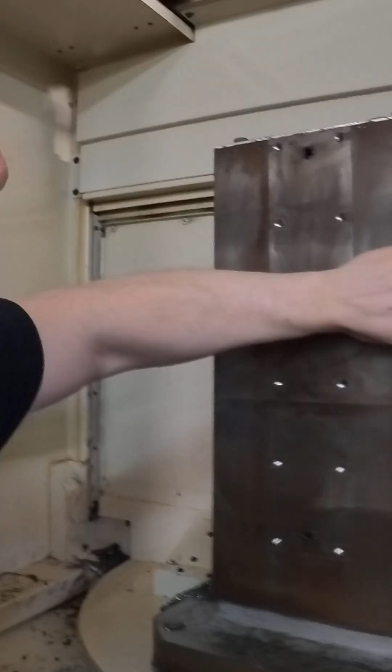However, I'm a little worried right now because I forgot to account for the fact that there's just not a lot of room, and with the wider trunnions I might not be able to use the plate like I wanted to. I was going to do kind of an exact copy of what I've done previously. This works great for 100 series, AK-47 or 74s, but with these wider ones I probably should have got a wider plate, so I may just exchange that, or I do have other fixture plates that can cover the entirety of the tombstone, but I'm a little wary on doing that on a first run of these, because if I mess something up, I mess up a big piece of steel versus just messing up a little test piece.

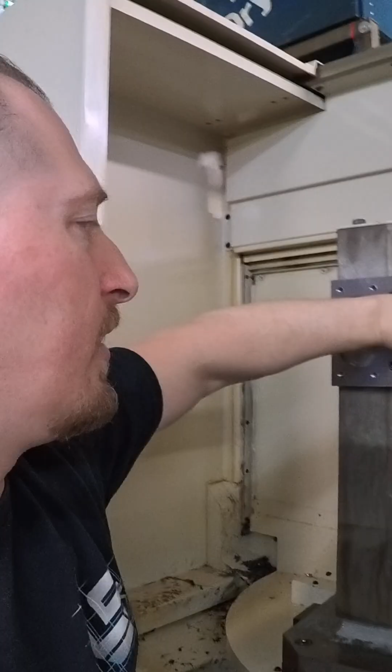But we'll get into it and figure out if I need to or not. I mean, I got a little room up there. It'll be scraping the edge, so I'll know once I design it in the modeling software. But right now I'm a little unsure.

Over here about to try this little repair on that stripped out set screw from the other day. Sometimes I like to just wait until I'm in the mood. I gotta be in the mood to mess with this stuff where it can easily get jammed worse and have a tough time. So we'll just see how it goes.

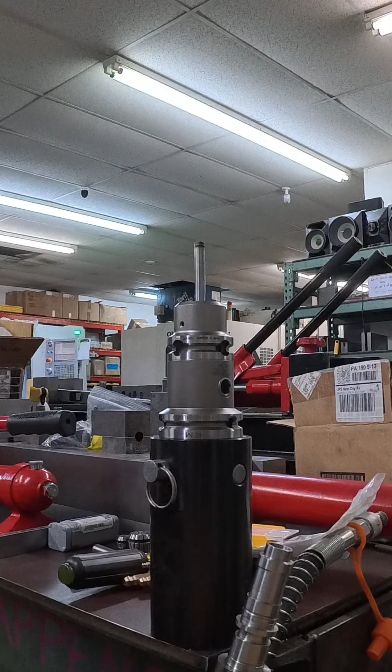I'm gonna drill it here with a... no, sorry, this is a 110 drill bit. I want to stay right in the center of this when I'm drilling it out.

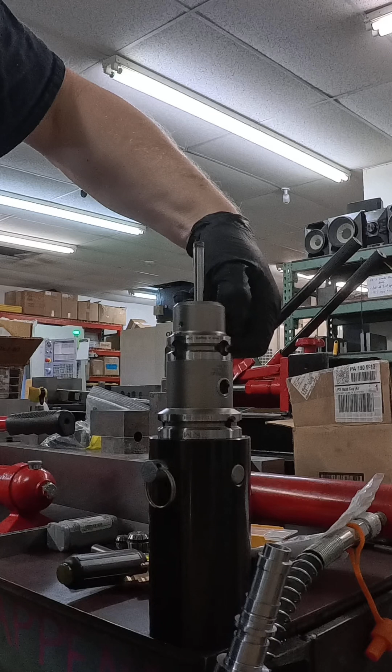It's actually a pretty long set screw. I'll take out the other side. You can see it's definitely over half an inch in length. And what I think happened is the tip of it mushroomed, and that's why it's not turning. Also it was just a junky set screw that had a pretty easy to strip out socket area. Actually, yeah, this is really long, so maybe three quarters of an inch in length.

But I'm just gonna get in there, I got this special easy out, just see if I can get that thing out. It's a pretty soft set screw, as you can see. Normally when you're drilling something like this, normally you get those hardened set screws. This one is not hardened, this one's made of, looks like stainless.

This should sink in there pretty good, and then we can try to turn it again. Based on how that's going, I think I'm going to go a little bit deeper. Of course, if the easy out don't work, I'm stuck drilling it out anyway.

Okay, yeah, that's good. Now we can tap that in there and get a wrench on there.

Matt, couldn't you find a smaller ball peen hammer? Tap wrench.

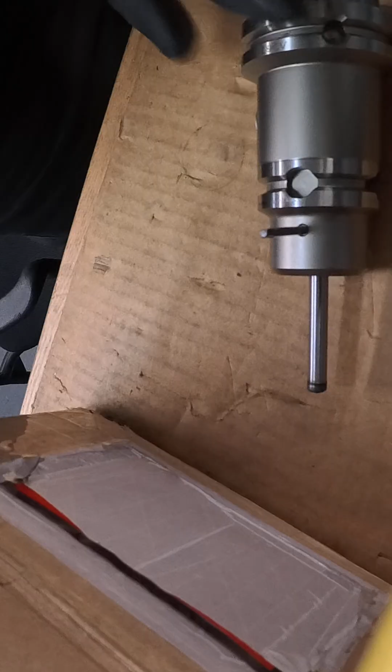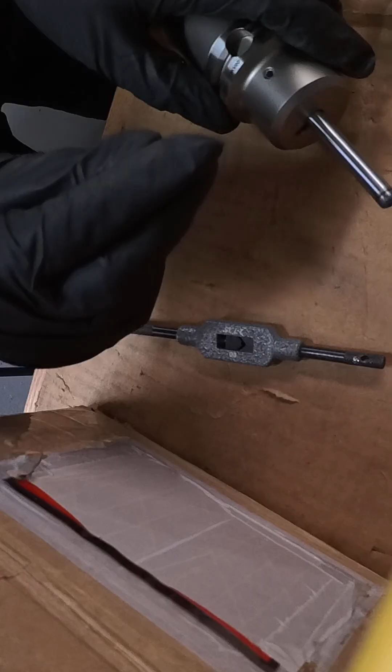She's just backing her way out. Come on. Why is that? Okay, I'm quickly losing being in the mood for this. Just how this is going.

Okay, look at that. There we go. Alright, haha, I'm the man. Okay, now, oh shit, it broke in half? Are you kidding me? Fucking A.

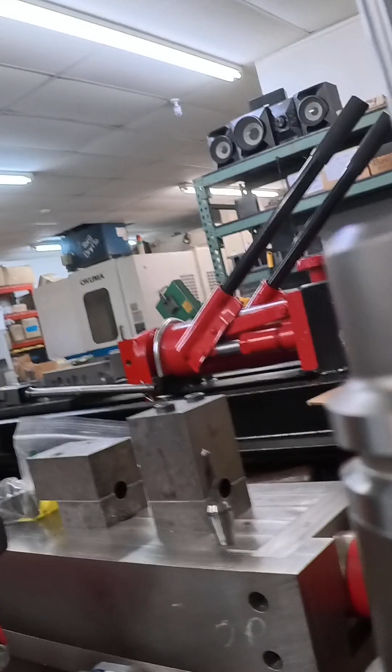Okay, so to review, you're not always good. This thing broke in half. This is the opposite side set screw. We drilled through, we got it to move, but the tip must be so mushroomed that it's split in half.

So we're gonna drill out the best we can and then just try to hammer this out from the back.

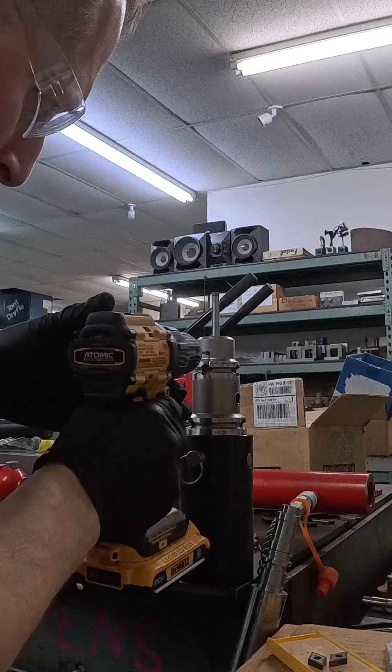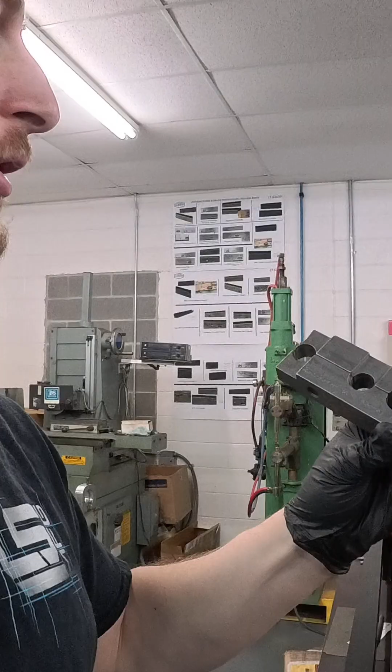Okay, here's a little setup. We're going to try to pop this out of there. We'll use the trusty ReCreator AK-74 barrel tool. It's got more than one use. Put this through here, the punch in there, and then pray this thing moves.

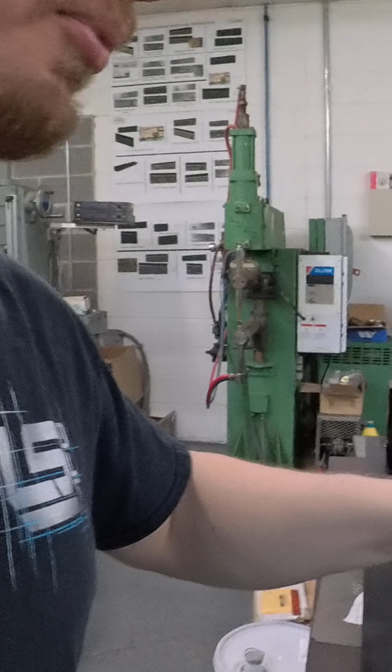I drilled it as best I could, until it stopped drilling. I hit the hardened boring bar, so let's see. Feeling it move. It did come forward somewhat.

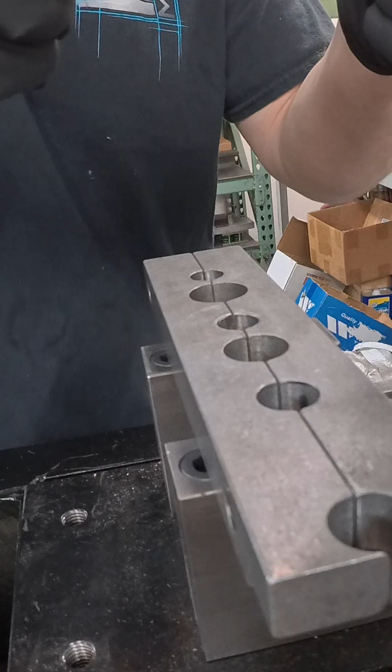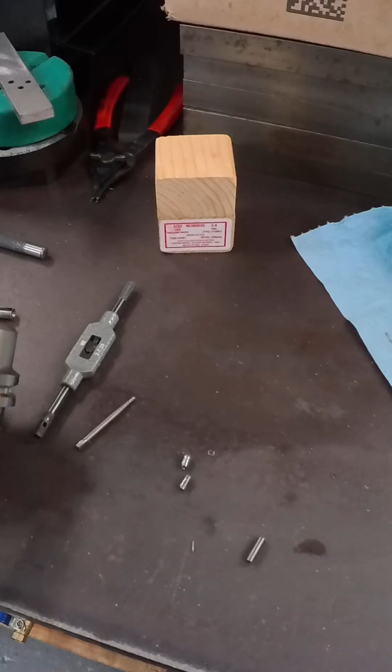Here, Justin, I'll show you what I messed with while I was doing my production work today. Okay, that set screw that was stuck, I drilled it, I easy outed it, but it snapped in half.

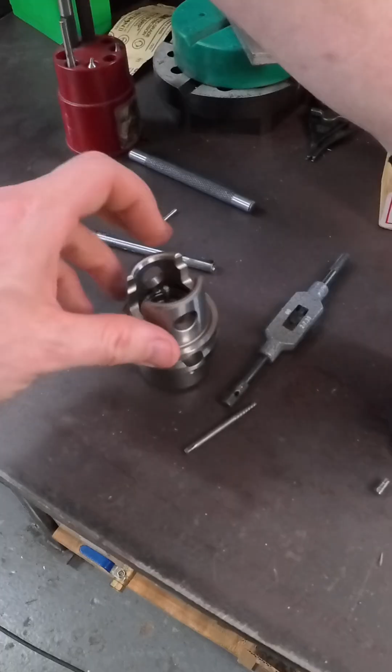So I hammered it out. Oh, by the way, I got a punch stuck in here now. I got to get another smaller punch. Yeah, that set screw broke. Yeah, my threads are all good here. Nothing's damaged. You ran another one in there to check it?

Well, I can see I never touched the threads, so the threads are fine. You can see that they didn't get touched by the drill bit at all. I do have to get another punch to knock that guy out because I jammed it in there. But all in all, we'll be up and running again with the new boring bar whenever that gets there. Hopefully Monday. It's not something we can punch through the back to get out?

Not at this size. I have to get one that reaches this way. I can't keep going this way. Okay, get a smaller one. But our punch sets are looking pretty shabby anyway, so we'll get some new ones. Yeah, the only option is like grind back this one. I ain't doing that. Yeah.

Anyway, that's the wrap up for Friday. We're gonna have to. Anyway, wrapping up this Friday. Didn't really go exactly according to plan. We just ended up doing a lot of production work today, which is good because it frees us up and it gets the guys that need their stuff quicker.

So there's no replacement for displacement, and having more guys working on receivers all at once is just going to get everything quicker. So now hopefully we bought a little bit of time here and we can get back on to the other new stuff we want to complete.

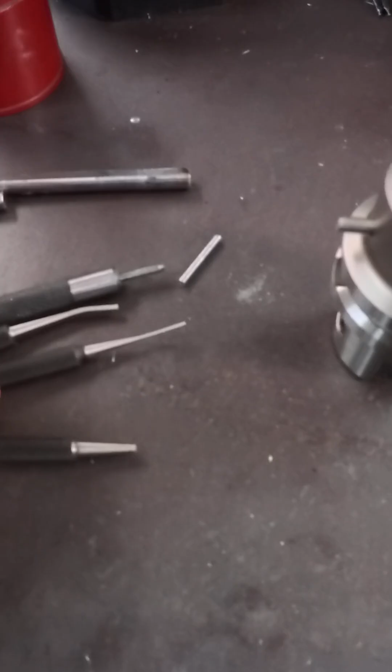All right, just a little update here. Total shit show getting this. This was the end of the stuck punch that was in there. It was stuck down in that hole. Immediately bent my 2 brand new punches.

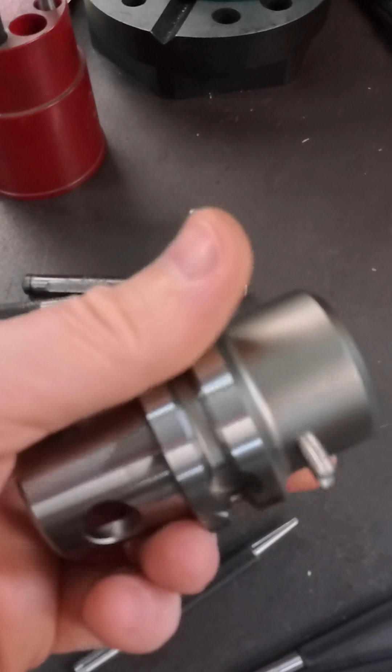Ended up grinding on, where'd it go? Broke one. Just total mess. Was able to finally get it out. I necked down this one a little bit. Finally came out. Got the new set screws. So saved this $300 or $400 little adapter. I'm happy. Now I can focus on what really matters.

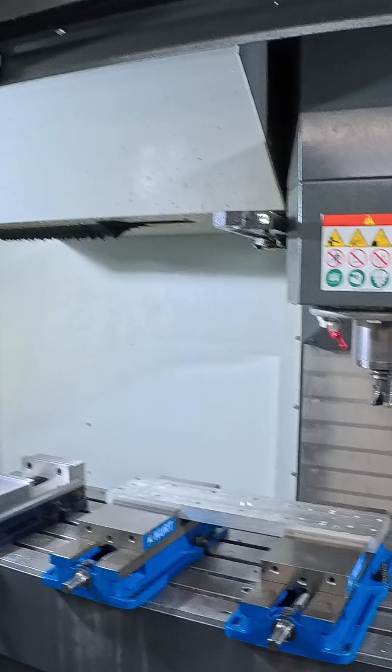Alright, so on to something with the M77s. This is going to be the fixture plate. This will hold the trunnions. In order to machine that, I got to get it set up nicey nice in here.

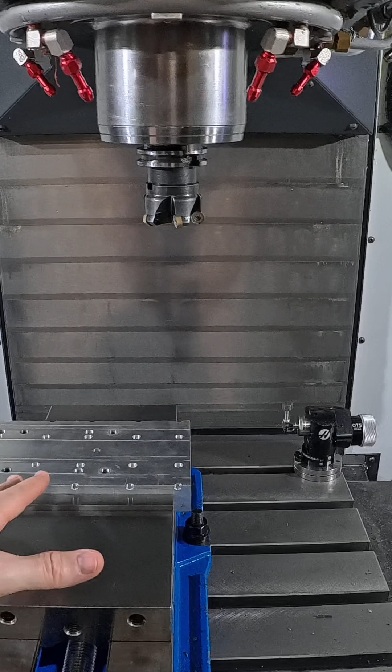And what I found was, first, this vise is out of line with these two. Because first you want to check that the part is square. When you're holding a long part like this, you run an indicator along the edge and make sure you're straight. I had it over here and it was coming out of whack.

So I moved it down, checked it, it was fine. Then I ran the indicator across each individual vise. This vise must have just been put in at a different time and wasn't aligned. So I left a little note for the next setup guy.

I'm not fixing it right now because it's the weekend, and on the weekend we don't do a lot of production work. We generally try to stick to prototype stuff or things that aren't production, so heavier thinking jobs.

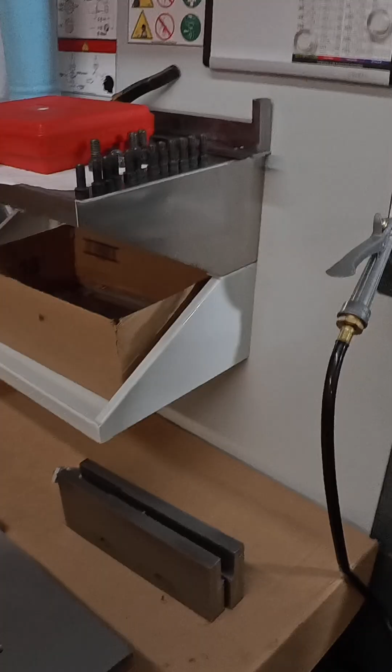Then the next thing I wanted to check was to make sure this was flat, and this part has been faced before, but it did not sit flat. So I'm about to flat it with that 2-inch shell mill before we put this nicely ground plate on there and machine away for the M77 trunnions.

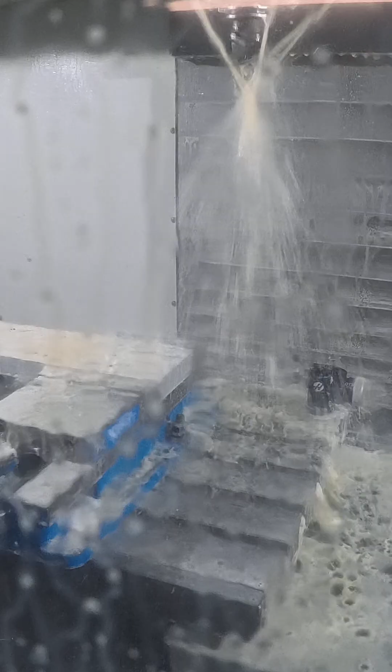Okay, there we have it. Nice flat plate.

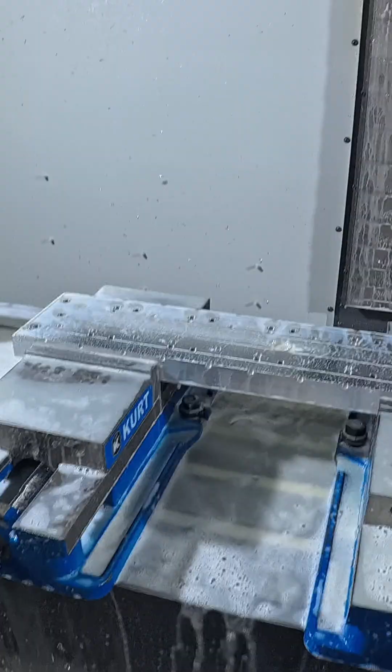Now this ensures that the plate is, we already indicated Y, and now we've machined Z. So if we put an indicator in there, alright, we've got an indicator in there, and we're going to run it across and just make sure that needle doesn't move.

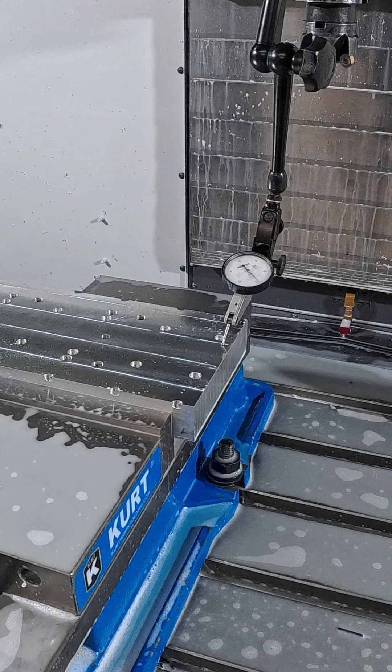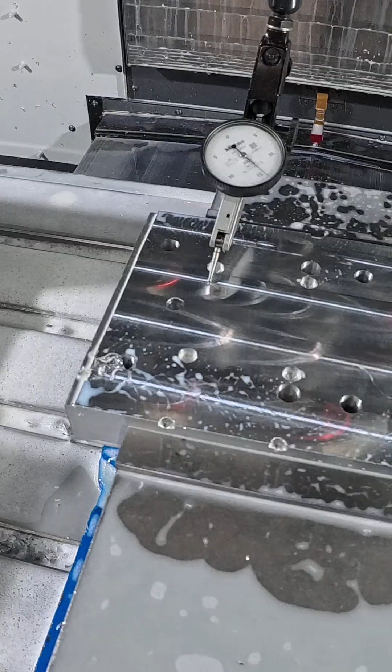You'd think the indicator is broken. It's not moving. Maybe a couple of tenths, nothing. Okay, so now we're all set up.

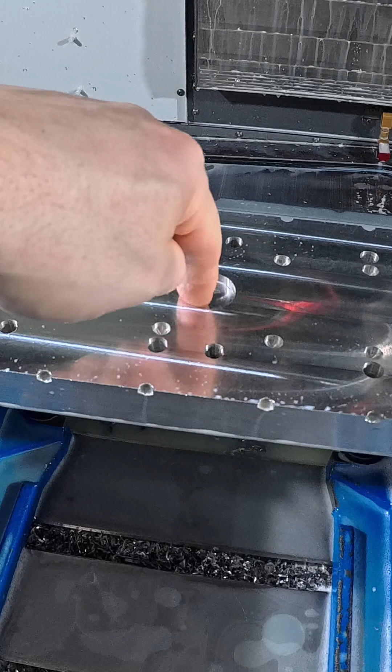Usually I'll machine a bore in the center of a fixture like this so I can find the center of it. It's going to align to our precision ground plate.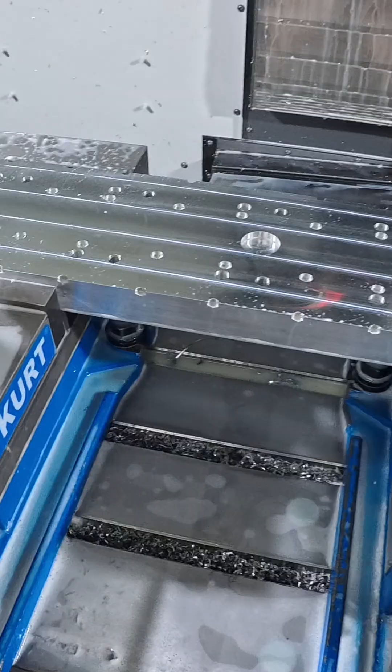And this is where we're going to make the pockets that are going to hold the M77 front trunnions. And then we're also going to add a pocket and a screw hole to this plate, and that'll hold the Mighty Bite clamp. So we have two trunnions in here.

The Mighty Bite's going to push it up against, we're going to make two side stops. I haven't made those yet, but that's the plan.

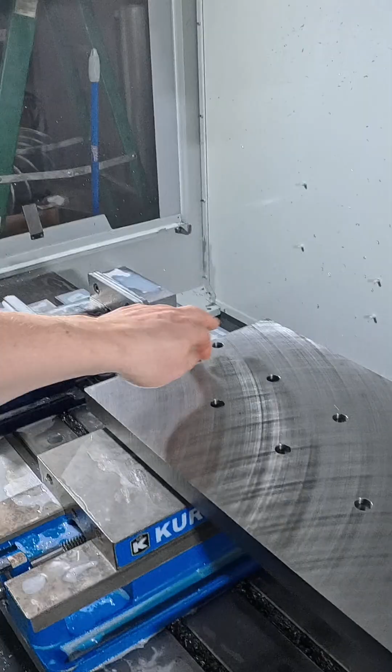You'll see soon. I was just about to bolt it down and I realized I forgot to put in the pins. These pins keep it aligned to the fixture, so all that work we did getting it straight now matters. So pins in, now I can bolt it down.

This is where all those long hours at the gym come in handy. You gotta lift heavy shit like this in and out of the machine multiple times.

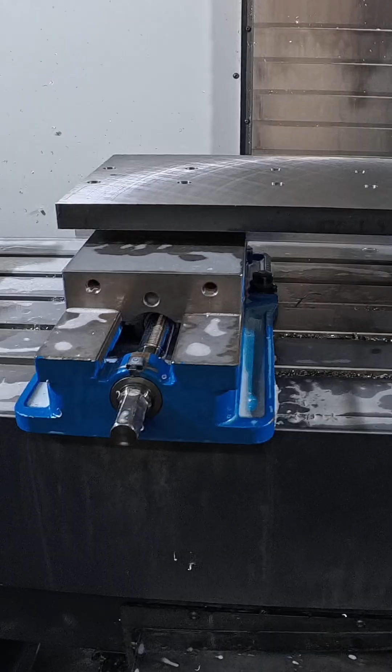So it took a lot longer than I thought it was going to take to get this fixture plate figured out. Spent a lot of time yesterday just working on the model and how it's all going to lay out.

So I'm going to just bring you guys up to speed and show you what we got going on here. So that's the fixture plate.

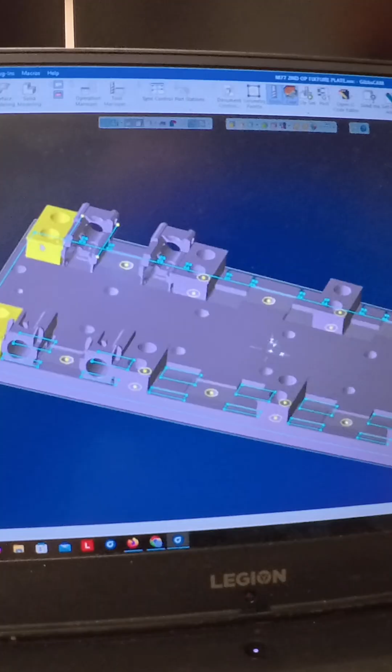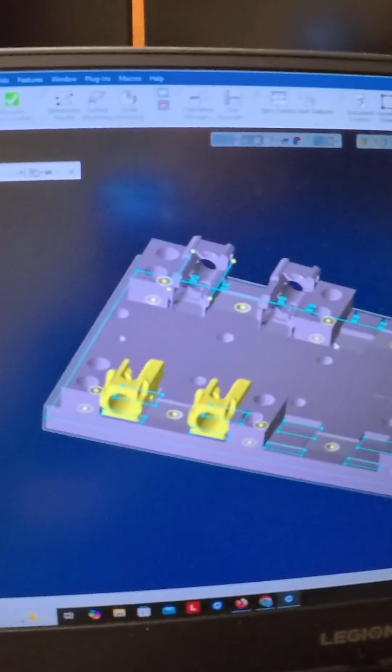Here's some blocks that we have to make for the fixture plate. There'll be a clamp that goes in the middle there. On this side we're going to use M77 trunnions, so there will be a total of 6 down this side. On this side we're doing RPK 74 or 47 trunnions. So you can have both of them on the same plate, just opposite sides of the tombstone.

This thing's kind of turning into a lot of work to program, even though it looks simple. It's like a big part, so there's a little bit of machine time.

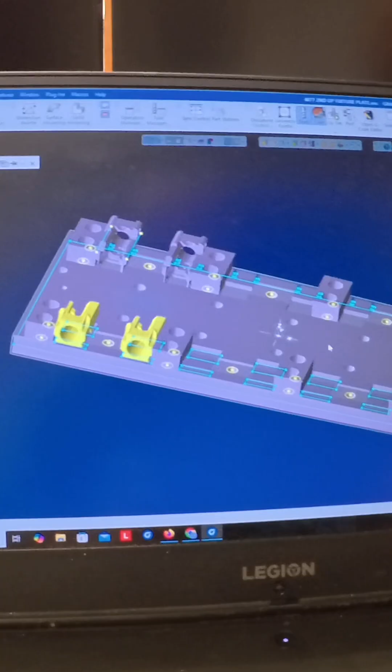Sometimes when I know it's just going to be a long thing, it's going to take all day to machine this, I'll just get stuff started. So, real simple, like the simplest thing, just running around the outside of this part, it takes a while because it's big pieces of steel. So I've just got that running right now.

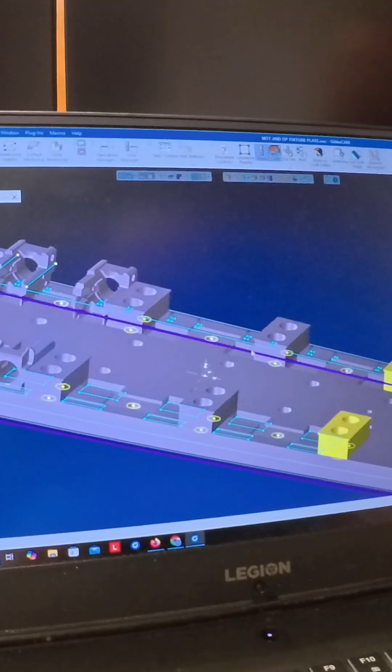And I'm going to set up these blocks in another machine and make these. And then by the time I'm rolling with that, I can get back into drilling, tapping, machining pockets, and making sure everything fits.